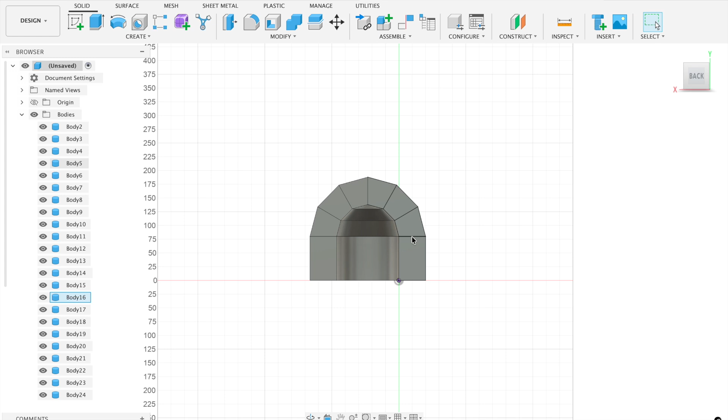We're going to create an arch like this, which we'll then use to create a couple of things. I actually created this arch in the middle first. We're going to create half of a dome, and then we're going to create a kind of vault. So here we go.

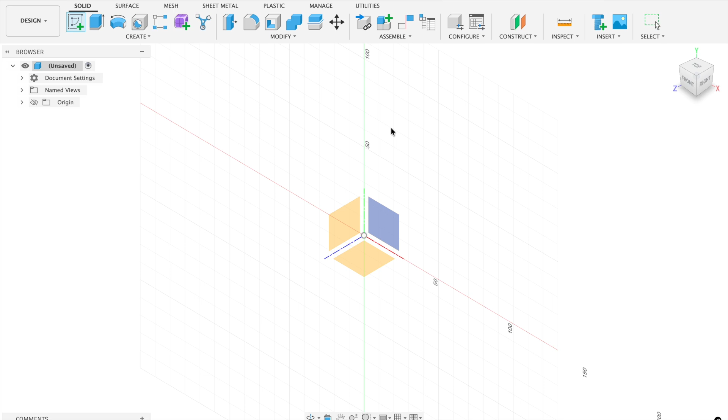Let's start by creating a sketch on this plane right here. We're going to start with a 2-point rectangle, one in the middle, and I'm going to make the height of this 80 and then the width 50. I'm going to hit return.

Now we're going to make our first upright part, so we're going to make this part right here. To do that, we're going to start with a line, starting in this corner and going over to this corner. Then I need to click again on that corner and start pulling out a line. I need this line to be 30 millimeters long, then hit the tab key, and I need the degrees to be 105.

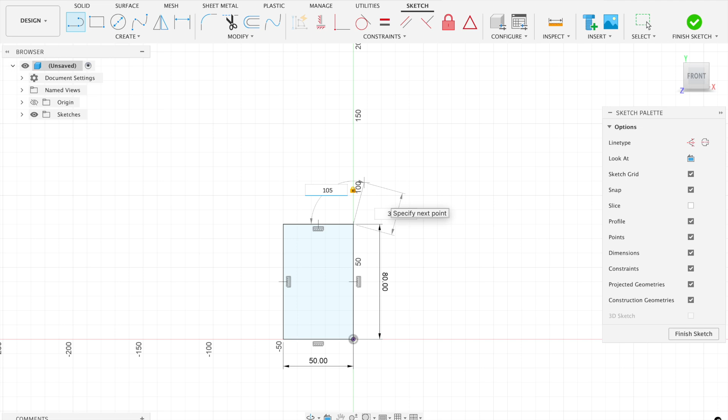I'm going to click and start pulling another line. I need this line to be 50. I'll click on tab and then type in 105, then click and complete the shape by coming back to the first corner.

I'm going to do the same process. Starting here in this corner, coming down here, clicking in this corner, clicking again and starting to pull a line, typing in 30, hitting tab, doing 105, clicking, pulling a line, making it 50, hitting tab, typing in 105, clicking, and then closing the shape.

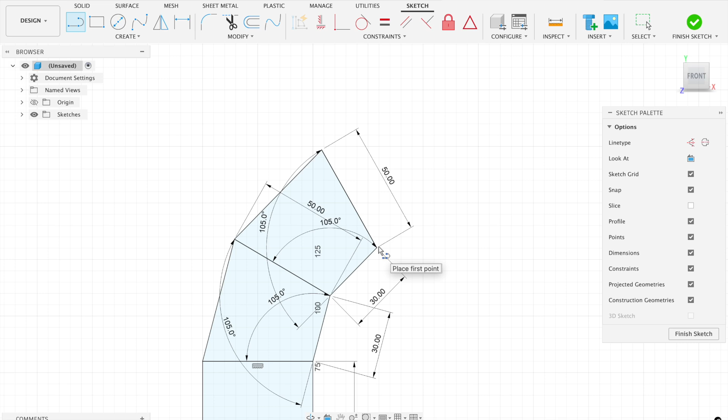I need to do that again. So starting here, coming down here, clicking again on that same corner, starting to pull my line, typing in 30, hitting the tab key, typing in 105, and clicking. Then starting to pull another line, making this 30, tab, 105, tab - I need this to be 50, sorry. I'm going to click and then complete this.

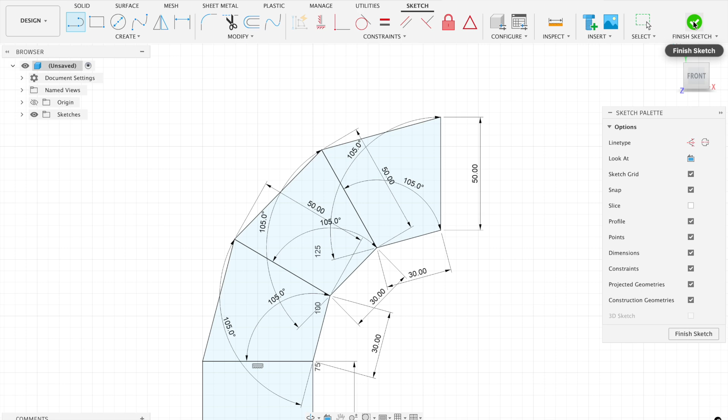So we've got half an arch right here when you're done. You can see that this is 90 degrees from this right here, this red line. And I'm going to finish my sketch.

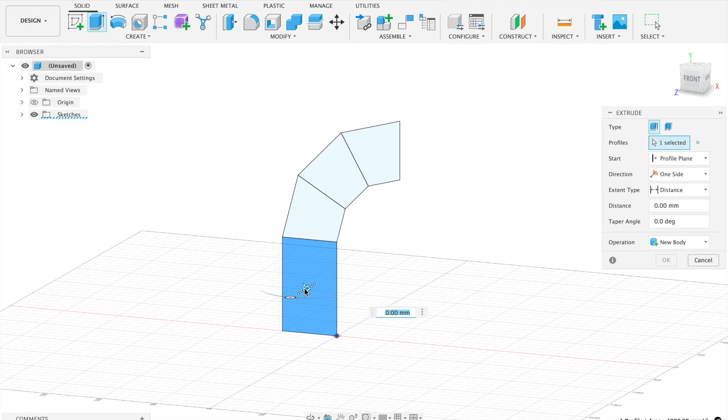Now I need to extrude these separately. So what I'm going to do is start by extruding each of these separately. I'm going to select this, and for me, I need to extrude this -50. You might have to do it 50, and then click OK. Now your sketch might disappear - you can just turn it back on in the browser.

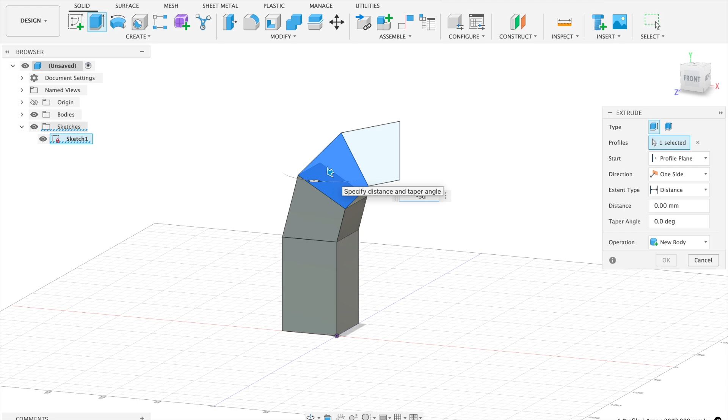I'm going to extrude this piece right here, -50, and make sure my operation says new body, then click OK. I'm going to do that again, extrude this piece, -50, making sure my operation says new body, click OK. I'm going to select this piece, extrude, -50, new body.

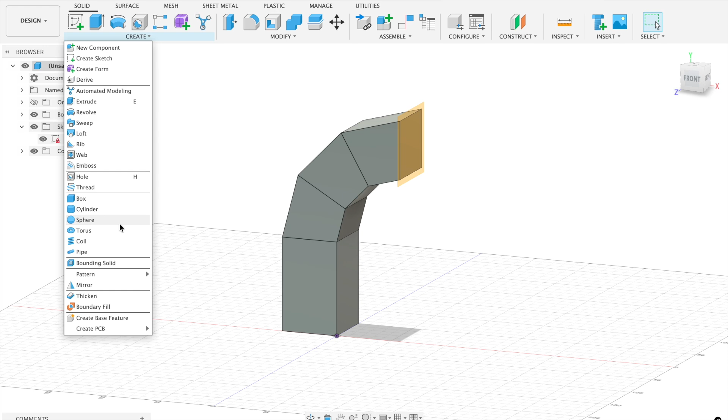So I've got my half an arch. Now my next step is I'm going to create a construction plane on this surface right here, and I'm going to leave this at 0 millimeters. This is going to be our mirror plane, because what I'm going to do is come up to the create menu and go to mirror. I'm going to select all of my arch pieces, so the bodies that I created earlier.

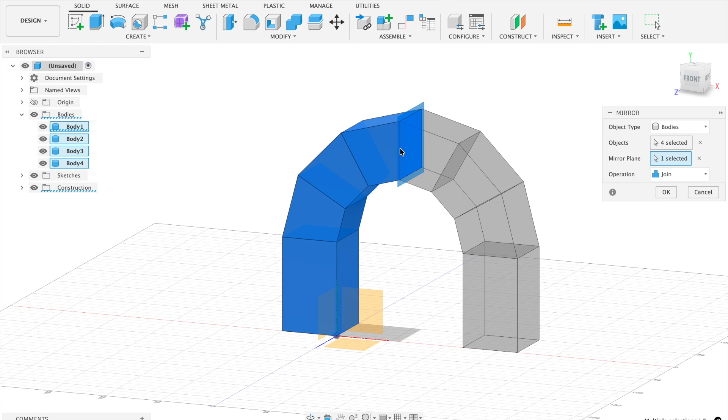I'm going to select the mirror plane from the menu over here, and I'm going to leave this on join because I want this to be a keystone. So this piece is going to join together, but the rest of these will be separate. And I'm going to click OK.

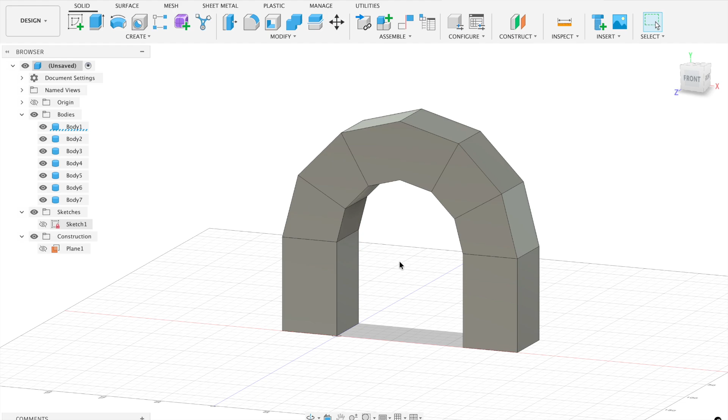You should see that you have 7 bodies. If I turn off my sketch in the browser and turn off my plane, you can see that this middle piece is now a solid piece, which is called the keystone. So now what I have is an arch.

I can make this a vault by using a rectangular pattern. I'm going to repeat this and make it into a rectangular pattern using the rectangular pattern tool. You may not see it in your menu right here - you might have to go to create, and look for rectangular pattern.

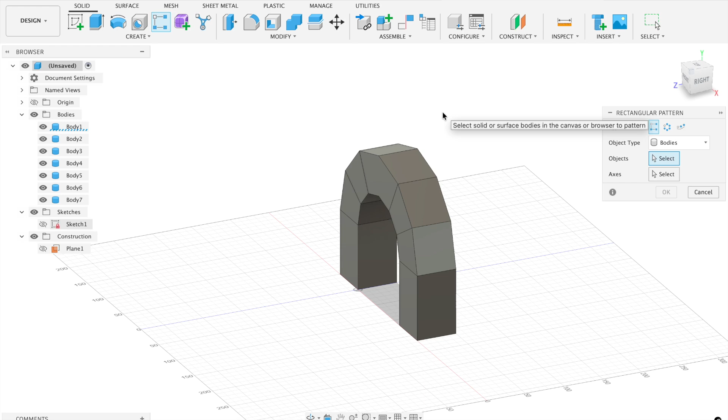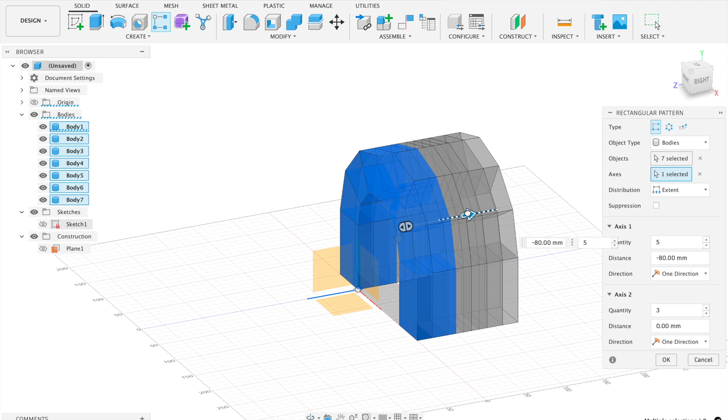So, rectangular pattern. I'm going to select all the bodies, and then I need to select an axis - I'm going to select this blue axis, which for me is in this direction, hopefully the same color for you. I'll select that, and you can choose how many you want, but I'm going to start pulling my arch here. I can add more if I want, so I can do 5 or whatever, and pull this until we get to a point that they are right there.

For me this is -200 because I have 5 of them. If I pull this any more, you'll see they separate, so I'm going to do this at -200. What we have here is something called a vault - a vault is repeated arches.

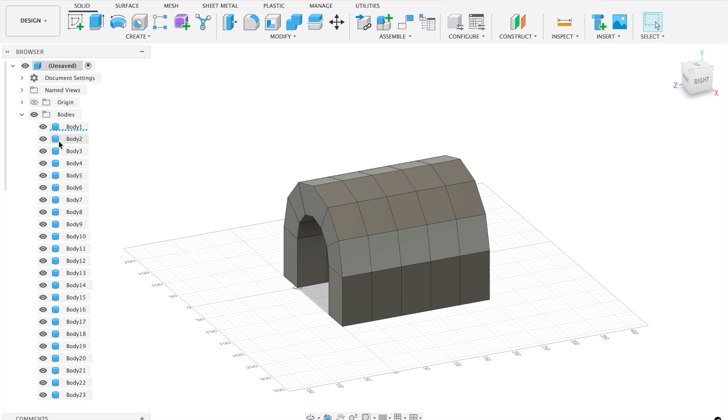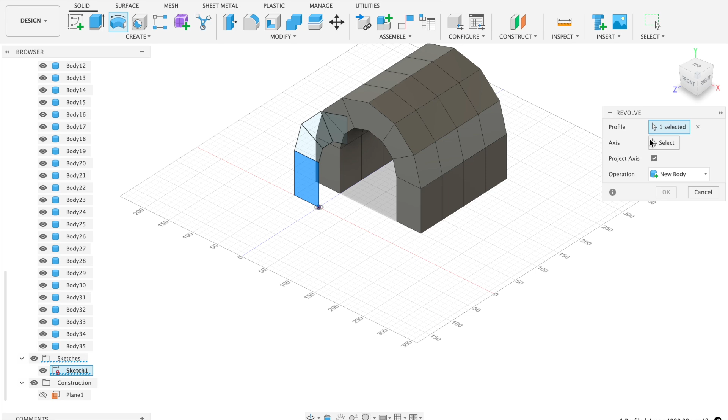What I'm going to do is select the revolve tool. Again, you might have to look for it in the menu down here. I'm going to select the revolve tool, select this bottom part, and then select an axis. I need to do this individually, so I'm going to select this axis, make sure it says new body, and click OK.

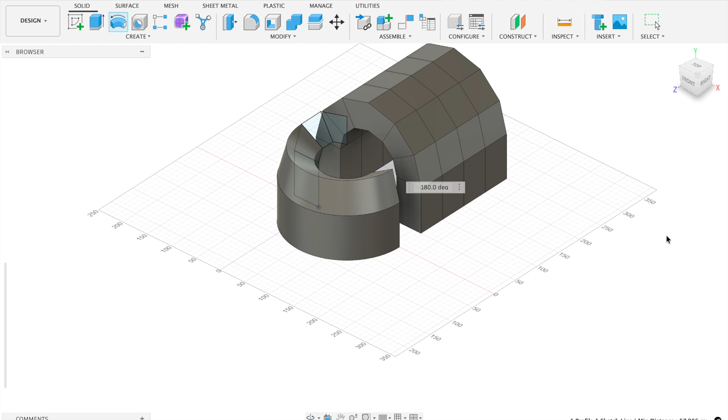Then I just need to repeat this: revolve, second piece, axis is going to be this, and I want this to be a new body. Click OK. I'm going to repeat this process.

So revolve, select this profile, select this axis right here, and do a new body. Then the last one - I will click revolve, select this profile, select this axis.

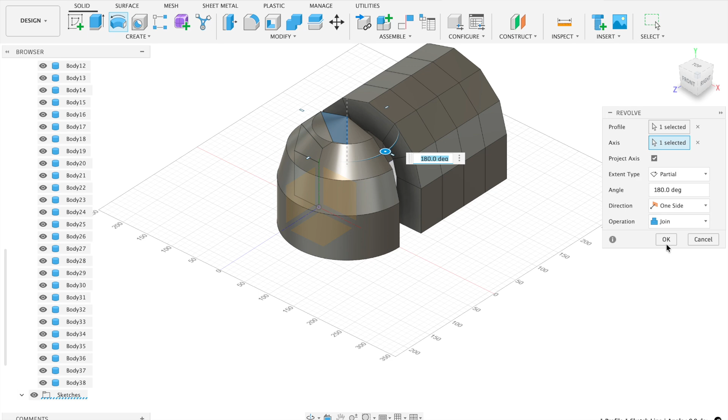So now what I've got is a dome - well, a half dome and a vault. And if I go back up and turn back on my first 7 bodies, you can see that this is now a vaulted, I don't know, passageway with a dome at the end. All right, thank you for watching.